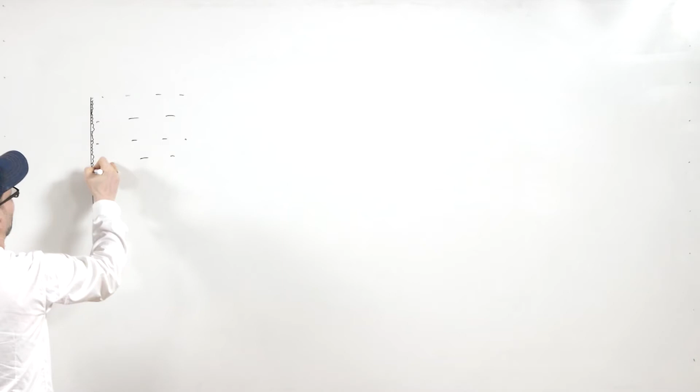As we know, if you look at the cooling curve of pure metals, once you reach this temperature and there is a slight decrease in temperature from this position, there will be formation of tiny grains, which are the nucleus.

Once these nuclei are transferring heat, they transfer it in this direction as well as in this direction. This side is the sand or air, so this is your sand, or it could be air, whatever it is.

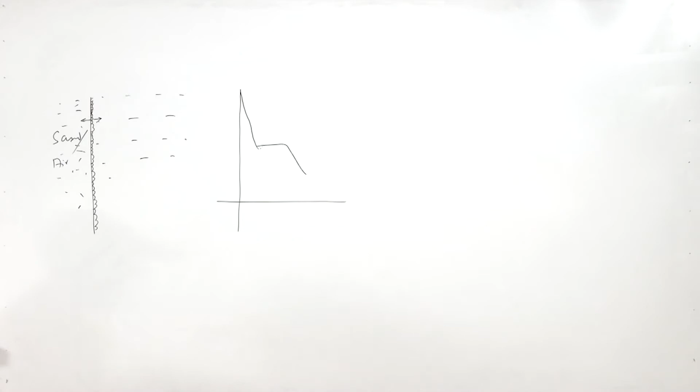Heat will be transferred in this direction as well as in this direction, and that heat is nothing but latent heat. Superheat has already been released up to this point, that is the degree of superheat already released.

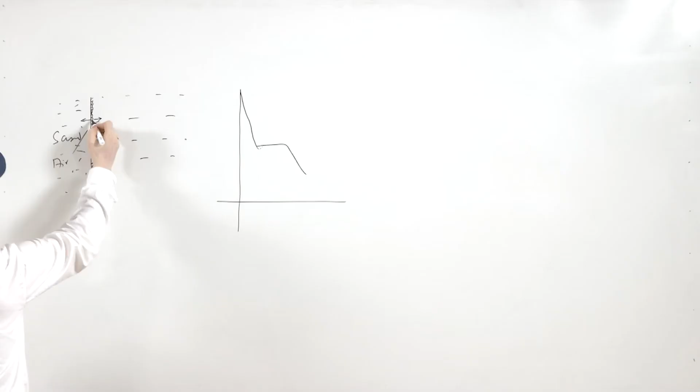Once you come here, the latent heat which is released goes in this direction, and the undercooling of the immediate liquid there is reduced. Because of these conditions there will be undercooling going on, there will basically be a drop in temperature going on.

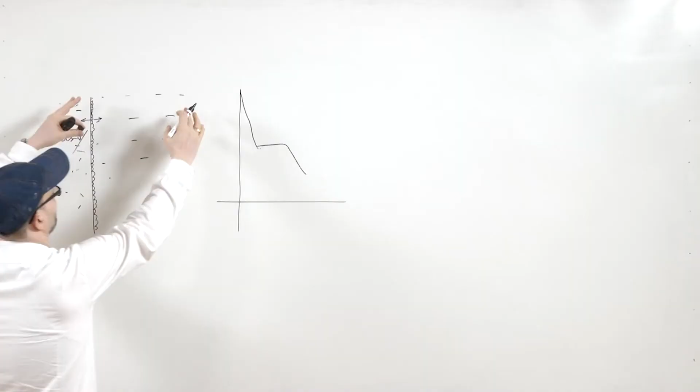Suppose nucleation starts in the whole domain, if the whole domain's temperature comes near the equilibrium temperature, but that is not the case. Wherever there is the largest undercooling, the temperature will fall more rapidly there, and the time will come first at that place where the temperature equals the equilibrium temperature, which is your melting or equilibrium temperature.

As discussed, once heat goes from here into this direction, whatever undercooling this region might have experienced, that undercooling is basically reduced.

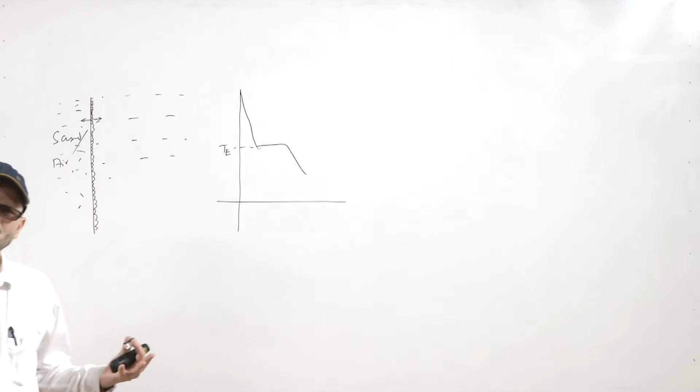So, what happens in this zone also, here the probable temperature will be close to 1085 or maybe 1084, 1086 or so, which will basically come towards 1083, so that it will also start solidifying.

Now, the thing is that when heat releases in that direction, its temperature becomes more. So, that undercooling which it could have experienced is reduced. So, nucleation is not promoted here.

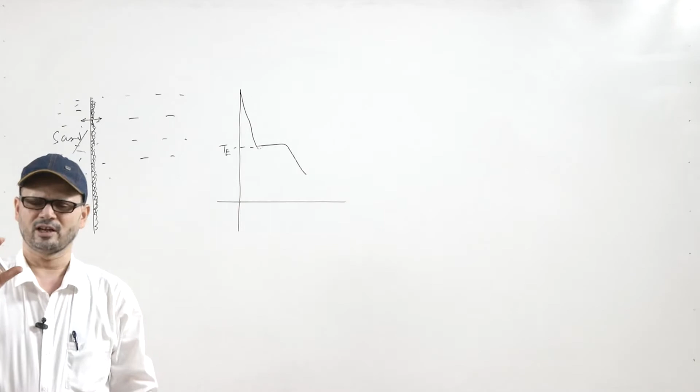So, once you have nucleation here, up to a certain distance you can experience that, because of the degree of undercooling or depending upon the rate of heat extraction, there will be formation of small tiny grains which are spherical, with no directionality. They are known as equiaxed grains.

Now, what happens is that the heat flow is primarily going in this direction. So, since the undercooling experienced or the temperature drop here is delayed, and since it is less, it will be closer to the equilibrium temperature. In that case, the nucleation does not remain predominant.

So, in the early stages of solidification, nucleation is predominant, but as time progresses, because of the heat release and the equalization of temperature in the remaining area, nucleation does not remain predominant, and in that temperature region growth becomes predominant.

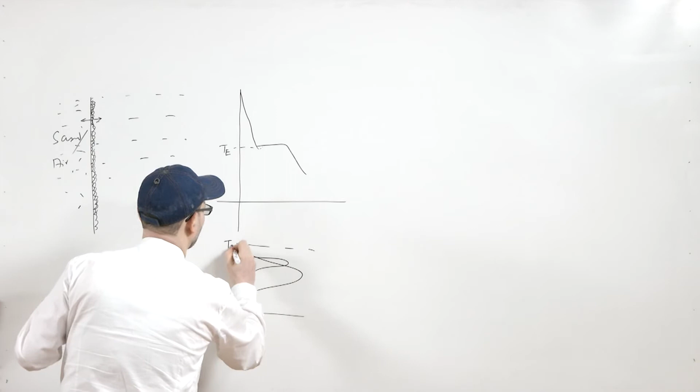We had seen earlier by looking at the rate of nucleation and rate of growth going like this. So, what we saw is that the rate of growth will be maximum towards this. So, if this is the equilibrium temperature, the rate of growth is predominant when the temperature is a little lower, closer to the equilibrium temperature.

So, that is why the growth starts. So, the growth of the grain starts. Now, the nucleation ceases and the growth of these grains starts.

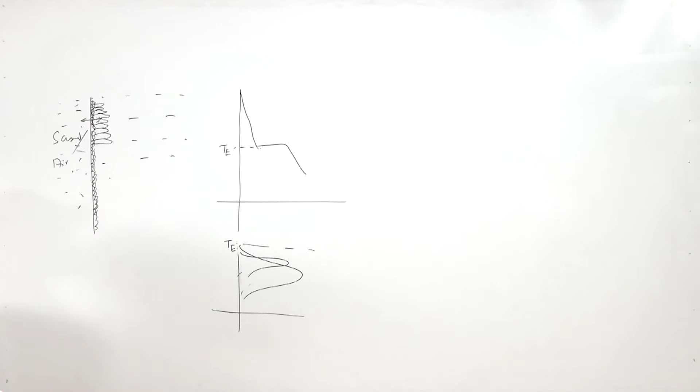Now, growth of grain will normally take place in all directions, because heat transfer may take place in every direction, but because this is the primary direction of heat extraction, the primary growth is taking place in this direction.

So, this growth which takes place here, these are the kind of grains known as columnar grains. So, the initial grains are equiaxed grains, and these grains are known as columnar grains.

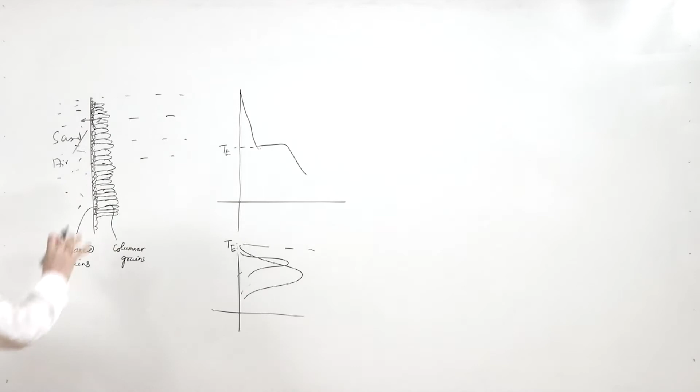This is the typical structure of pure metals, and this growth continues till it reaches the center line of the casting.

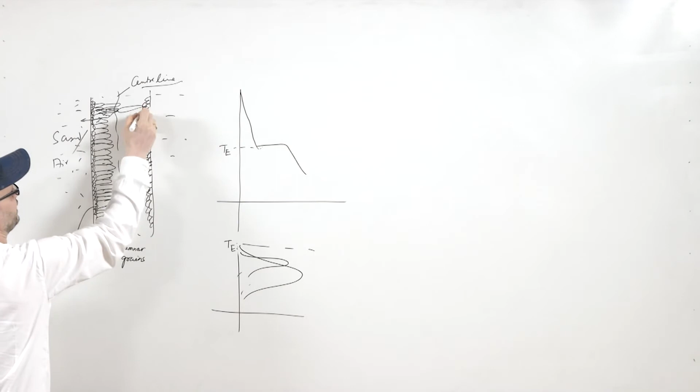So, from this side also you will have similarly fine equiaxed grains initially, and then you will have the columnar grains extending till the center of the casting. Like that you will have the microstructure in the case of pure metals.

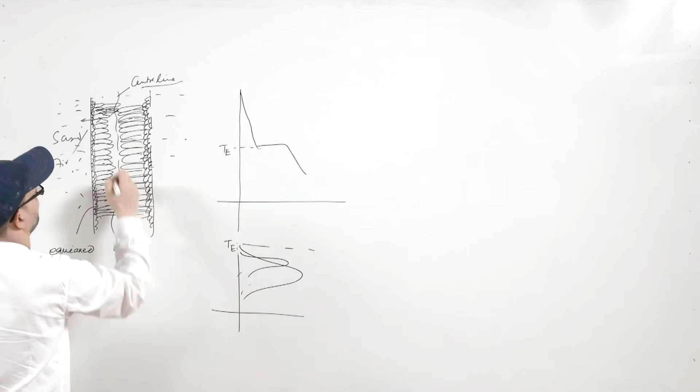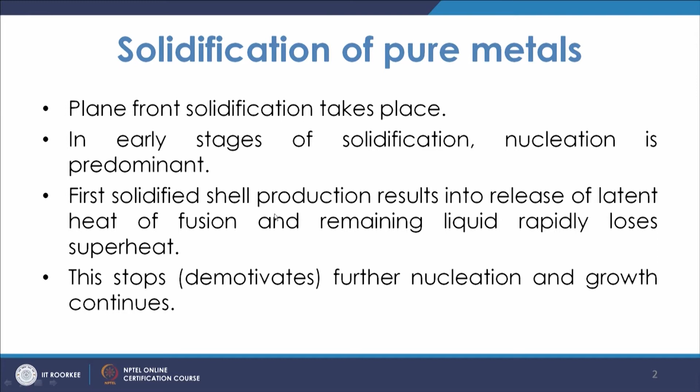So, pure metals show a structure like this. In early stages of solidification, nucleation will be predominant, and the first solidified shell production results in release of latent heat of fusion, and the remaining liquid rapidly loses its superheat. Since it loses its superheat, the chances of further nucleation stop and the chances of growth predominate over nucleation, and that is how solidification takes place.

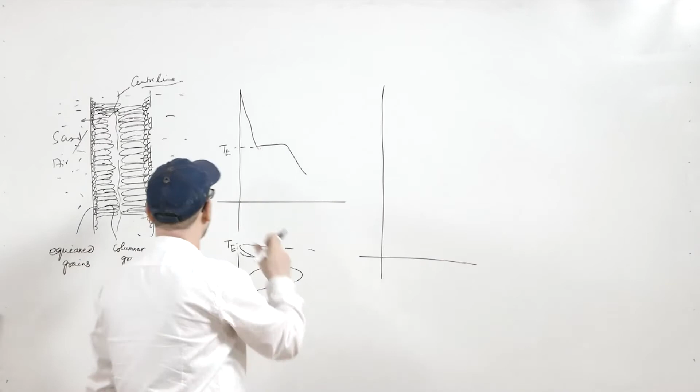So, what happens if you look at the temperature at any point, when you pour the liquid metal, at that time the temperature is given like this. As you see, whenever you start pouring the liquid metal into it, the immediate solidification starts basically at the mold walls. So, if this is the distance from the mold face,

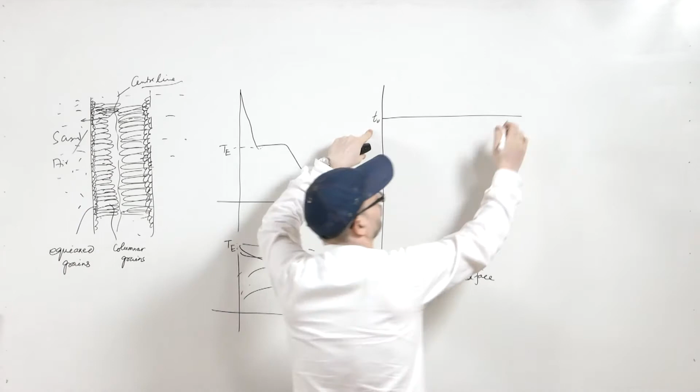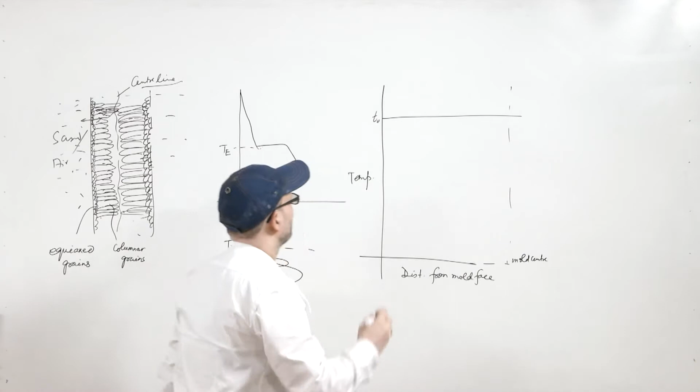at zero time you have this temperature, suppose. Now, at that time, distance-wise, everywhere you have the mold face, and you go suppose into the mold center, maybe this is the mold center, suppose this line is the mold center. So, what we see is initially your temperature is everywhere the same, but then quickly as time progresses, the temperature comes down here. So, this way you will have the temperature line.

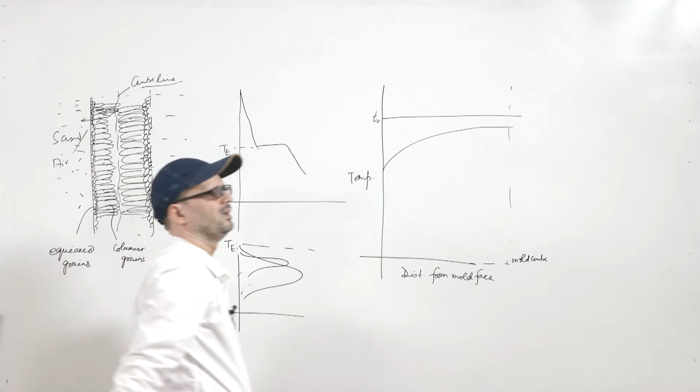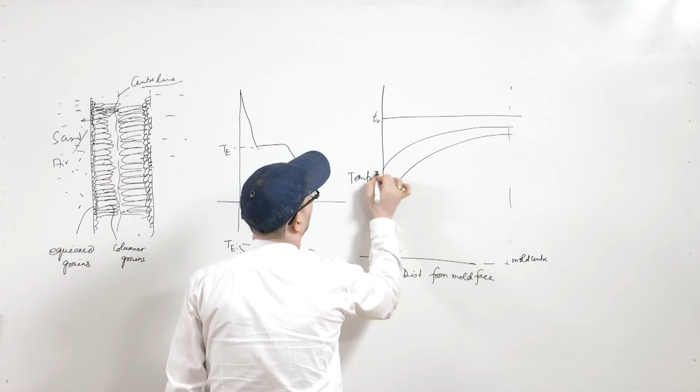Slowly after some time again, maybe your growth goes like this. So, suppose this is your equilibrium temperature. In that case, what we see is that at this mold face, slowly...

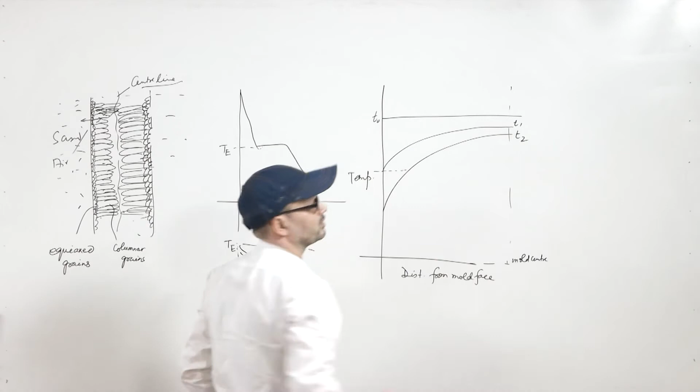So this way, at the center you have temperature, and at the mold face the temperature is becoming quite less. So the solidification has started here itself. At this time, at the face the solidification has started, whereas here in this case that is not the case. Here already it is solidified, and at this point the temperature, so here at this point the solidification will start.

So this way, as the time progresses, you see that there will be more temperature in the central region.

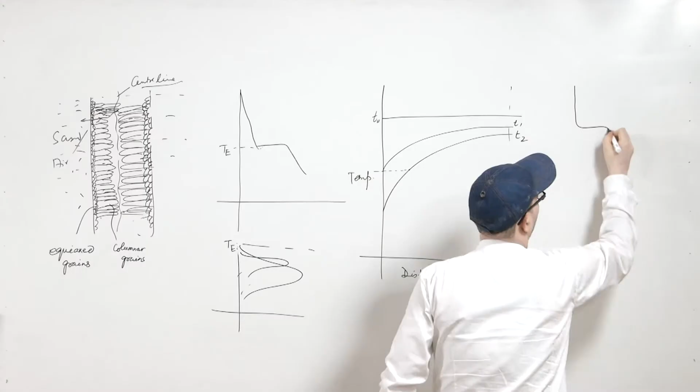So suppose you have a casting here. In that case, if this is the central region, then once you pour, suppose this is a casting and this is your sand, so once you pour the liquid metal into it, then what will happen? The first solidification will start at these places.

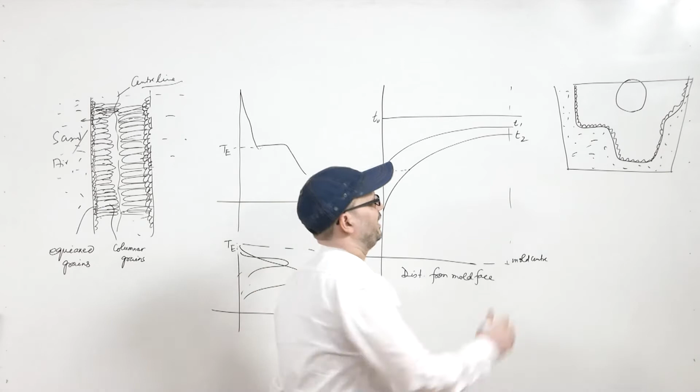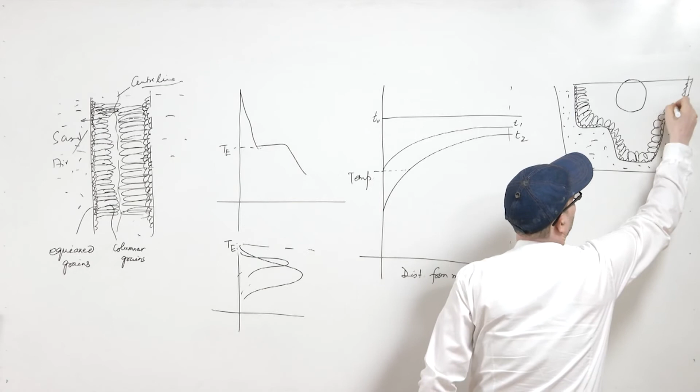Then after that you will have started forming the columnar grains. And so this is how what we have understood is that your initial formation will be of the equiaxed grains, and then further.

Now if you look at this temperature, the temperature drop will be quite fast at this point. So if you take this point as 1, this point as 2 and this point as 3, what we see is that normally the temperature drop, if you look at the cooling curves, at the first point it will quickly come down, it will quickly come down.

So it will come and then it will go like this. And similarly, suppose this is the equilibrium temperature, the second point will come and then it will go like this, the third will come and then they may go like that. So this way you have the delay in these regions, this is the second point and this is the third point.

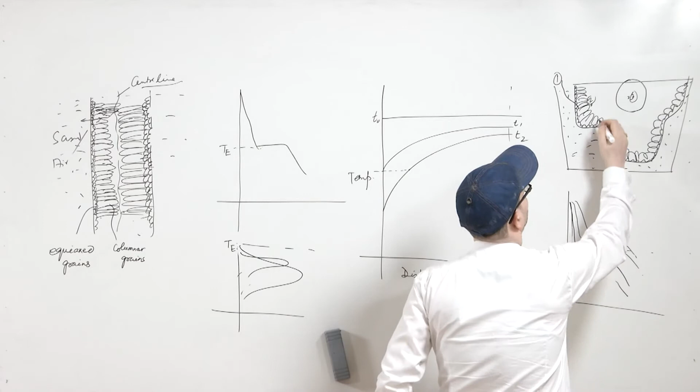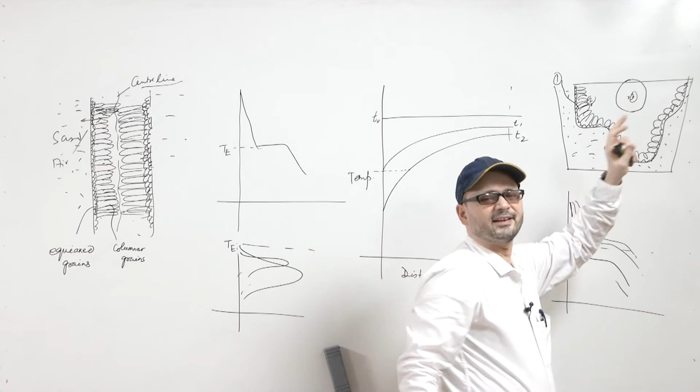So this way you see that the temperature in this region is more and more, it is solidifying in the end. So what we see now is this kind of solidification mechanism, where you will have initially the formation of a certain small thickness, and then this thickness further grows slowly, and this grows in a very uniform way. From both sides, the growth of these cells goes on continuously, and this growth continues till these grains meet at the center.

So in this way the solidification will cease at this point, because from both the sides the solidified cells are approaching each other and they are meeting there. So this way your solidification is complete here.

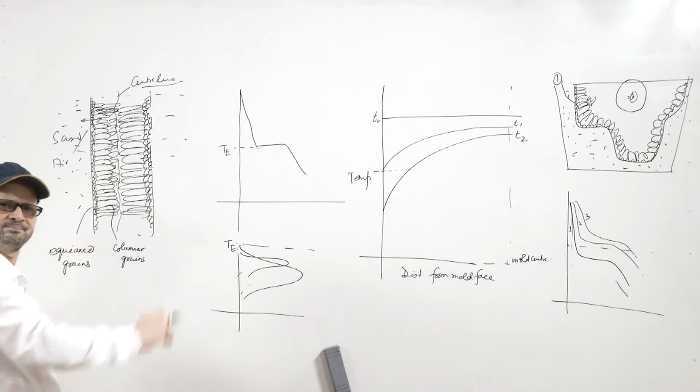So what happens is that with time, suppose you have this section which is to be solidified - initially all is liquid, and with time what will happen is that some portion will get solidified. So this will be solidified at a certain time. So if T is 0, it will become T1, and T1 is more than 0.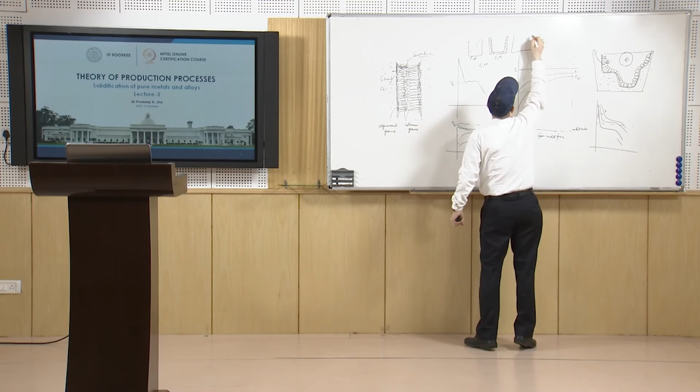Similarly, after some time further, you will have this much solidified. So this will be at T equal to T2. So here at 0 time there is no solidified shell, and there is some thickness of the shell, that is D1. Then at time T2, the solidified shell's thickness is D2. So T2 is more than T1.

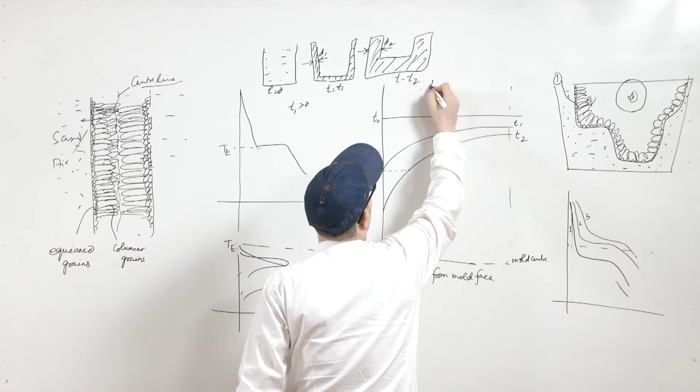So this way, as the time progresses, the thickness of the solidified shell goes on increasing, and it is increasing in a planar way. So the front is moving in a planar way from both the sides, moving in a straight line way, as you see here, that they are moving on the inner sides, and it will go till it reaches the central portion. So at certain time it will completely solidify. So this is an example of plane front solidification.

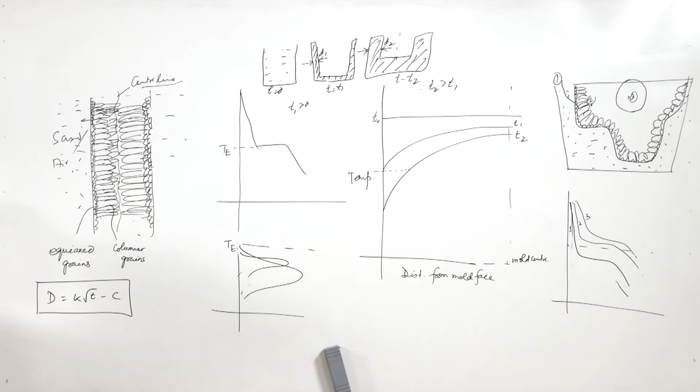So what we see is that this is a case of plane front solidification, and the thickness of the skin solidified - this is known as the skin. So the skin which is formed, initially you will have a very thin skin formed, and slowly the thickness is basically increasing. So the thickness of this solidified skin will be depending upon the time, with the formula d equal to k root T minus C. This formula tells us what will be the thickness of the shell formed at a certain time.

So K and C are constants, and D is the thickness of the skin. The magnitude of K and C is determined by the size of the casting and how fast you are extracting the heat from the mold. So that will depend upon the size of the casting, and the type of mold material used.

So, based on that, the constant K will depend upon, and this C is largely determined by the degree of superheat. This way you can find the value of the thickness of the solidified shell.

Further, if you analyze the solidification time for a casting, it is seen that the solidification time is proportional to the square of the ratio of volume to surface area of the casting. That rule is known as the Chvorinov Rule, proportional to V by A square.

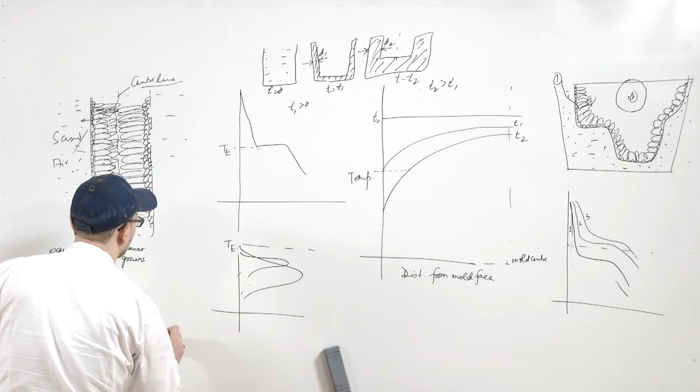So, in this case, this is known as the Chvorinov Rule. This is something about the solidification of pure metals, where the metal is expected to freeze at a constant temperature, or it may also apply in the case of eutectic materials, eutectic composition, where freezing is carried out at a constant temperature.

Now, we should discuss the mechanism of solidification in the case of alloys. As we know, in case of alloys you have a freezing range. So once you see the phase diagram of any binary alloy, you will have a phase diagram like this.

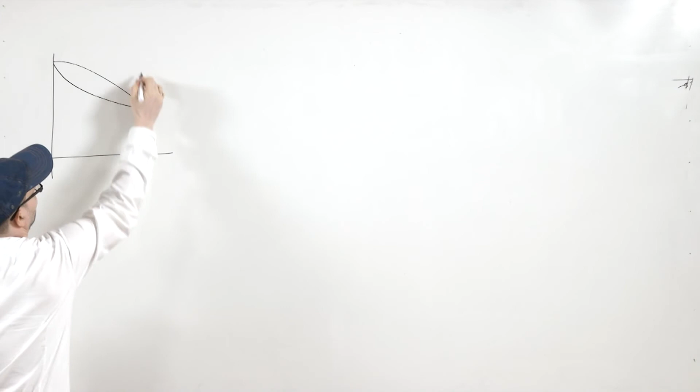So what you see here is the solute percentage. When the temperature drops, the solute particle, so any solid which is precipitating out, this solid will have, at any point you have solid as well as liquid. Now what we see is that at this point you will have solid as well as liquid.

This is the concentration of the precipitating solid. So at this point is A and this point is B. A is the point which talks about the concentration of solute in the solid, whereas in the B part the concentration of solute is different, that is more.

So the liquid which is there in the adjacent region, at the same time you will have solid as well as liquid. The solid is having lower solute concentration, and the liquid which is adjacent to it has higher solute concentration. Now, as you see, with the increase in concentration of the solute percentage, the liquidus line behaves differently.

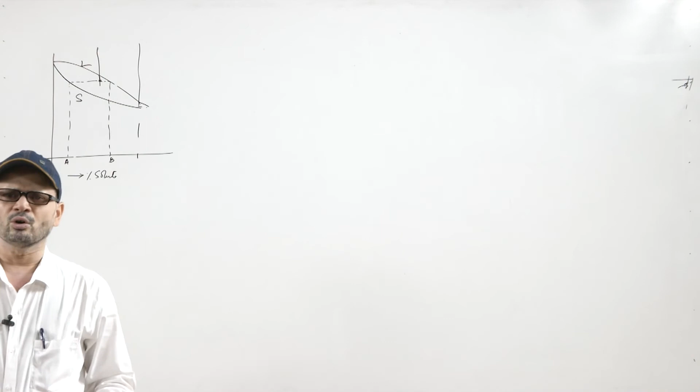This is the liquidus line and this is the solidus line. So with the increase of solute concentration, the liquidus line is basically going down, the liquidus temperature will be less. Now what happens because of that?

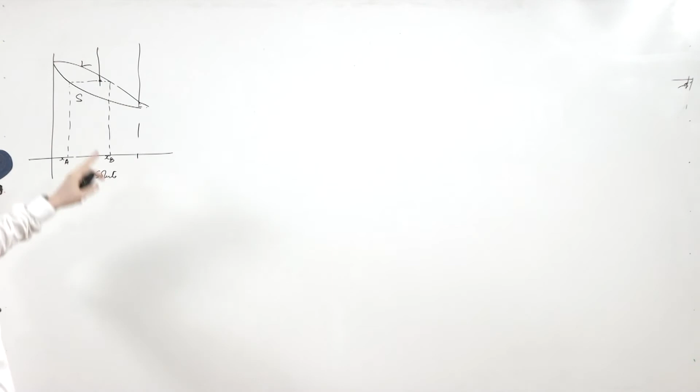Now what we see is that if you talk about this instant, you will have solid of this solute concentration, so suppose you take XA and XB: solid of XA solute concentration, liquid of XB solute concentration. Now this sets up a concentration gradient.

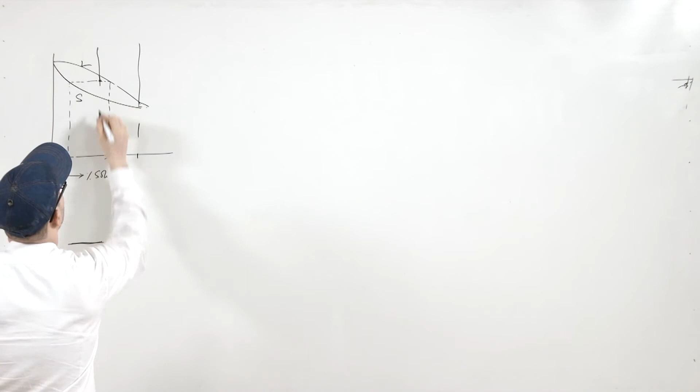Now, because of this concentration gradient at this interface, if you take this point, this is the solute concentration in the solid. Now at this point your concentration will vary this way. This is the concentration on this side.

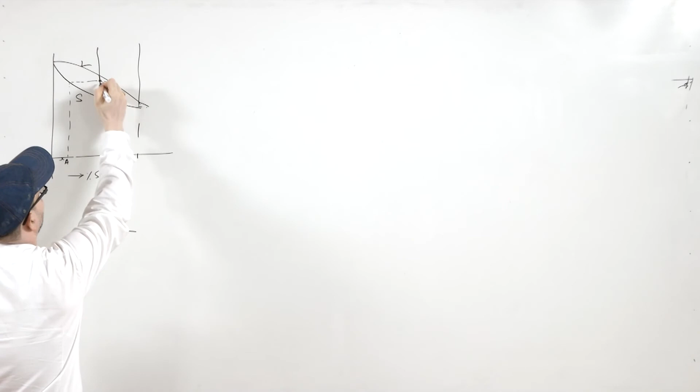So at this point you have the concentration of solute in the solid, and this is the concentration at the interface of the solute in the liquid.

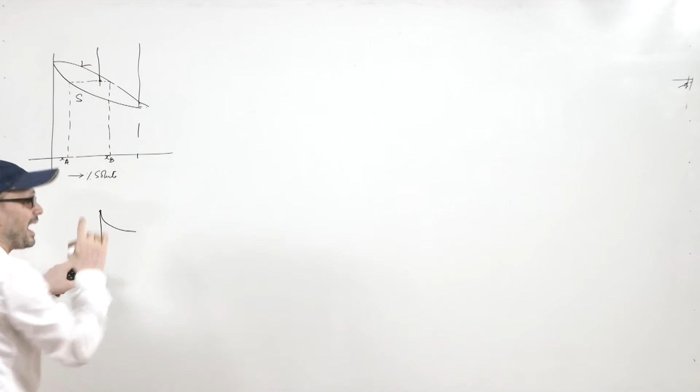So what happens, because of this very high value of solute concentration in the adjacent liquid, if you already have this much solidified layer and it has to move further, since the solute concentration here is quite high, the liquidus temperature will be quite low.

So this liquidus temperature will have a gradient, it goes like this. This is the equilibrium temperature. So basically because of this,

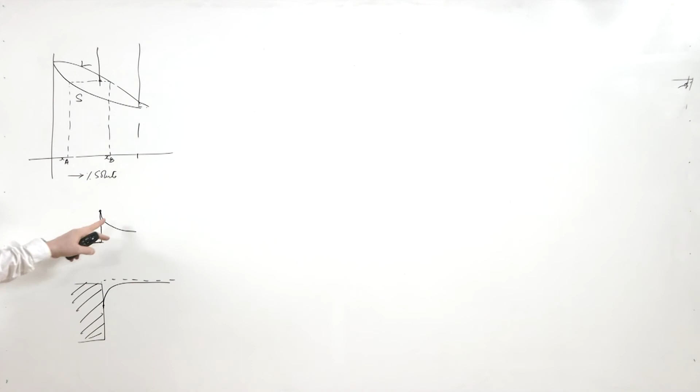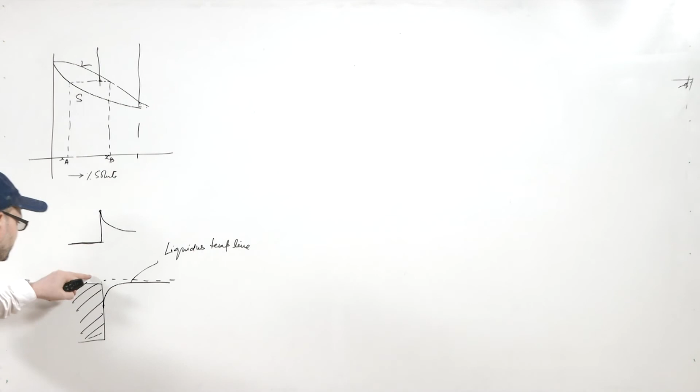solute concentration difference, there will be another new liquidus temperature line which is defined. This liquidus temperature line is modified from the earlier liquidus temperature line into this shape.

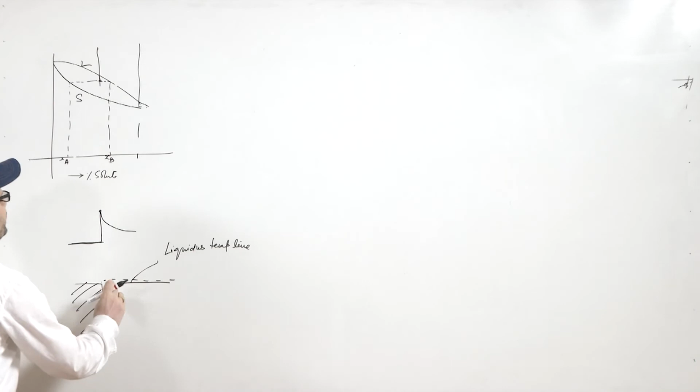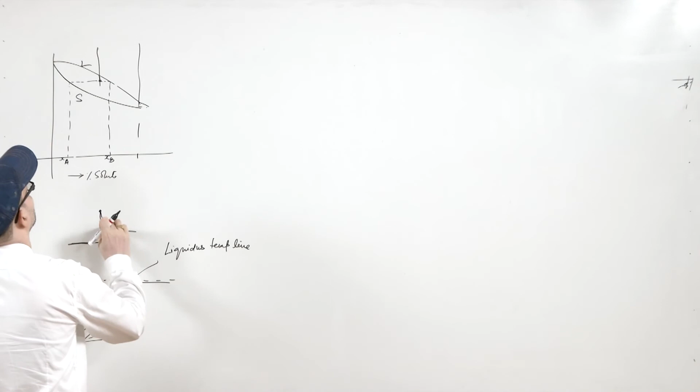And because of that, what you see is that in this region the temperature is quite, so here the liquidus temperature line has come down quite considerably. So now let us see how the solidification will proceed in that case.

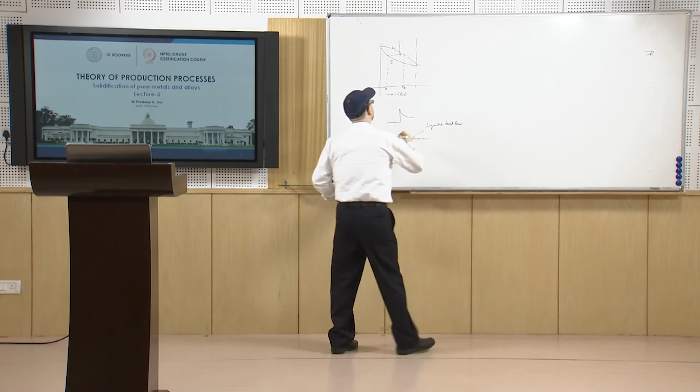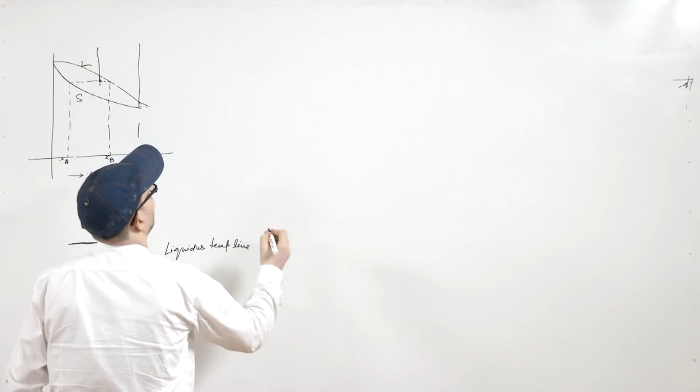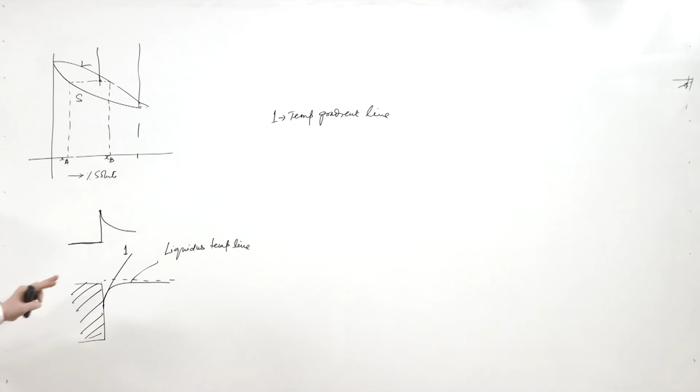Now, if your cooling conditions are such that you have the temperature gradient line 1, if your temperature gradient goes like this, because this is your solidified region, you have the distance from the mold wall on one axis and temperature on the other.

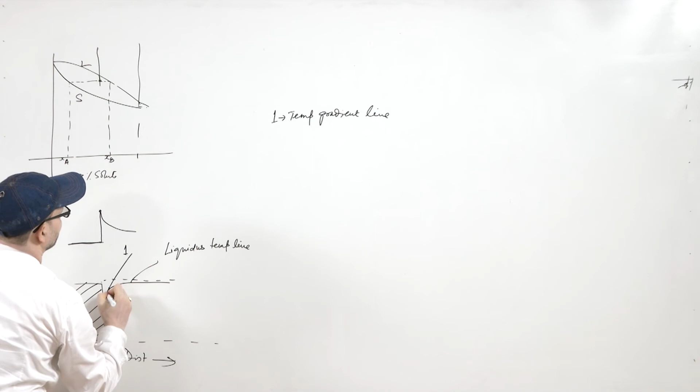Now, in that case, if this is the temperature gradient line, and if it does not go past this liquidus temperature line, in that case you will have a plane front solidification.

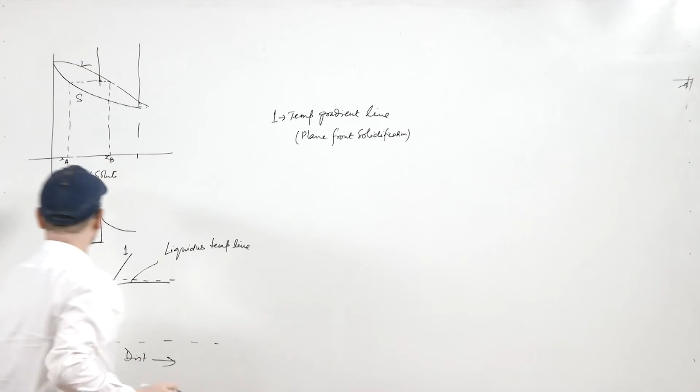So what you see is that the temperature is near the liquidus at this solid cell, and that is why slowly the temperature will come down and the nucleation will start and there will be plane front solidification. Now this is a very high kind of heat extraction rate, so normally that is not achieved.

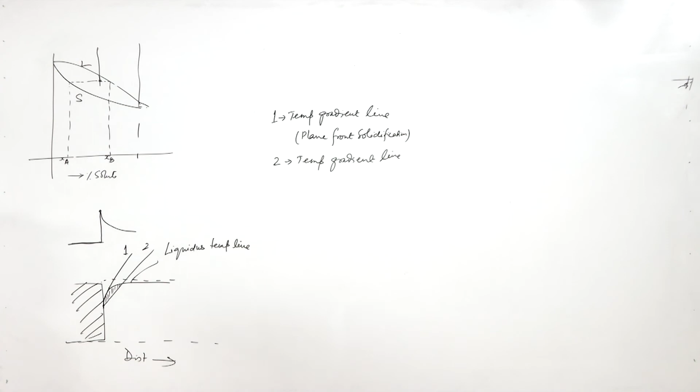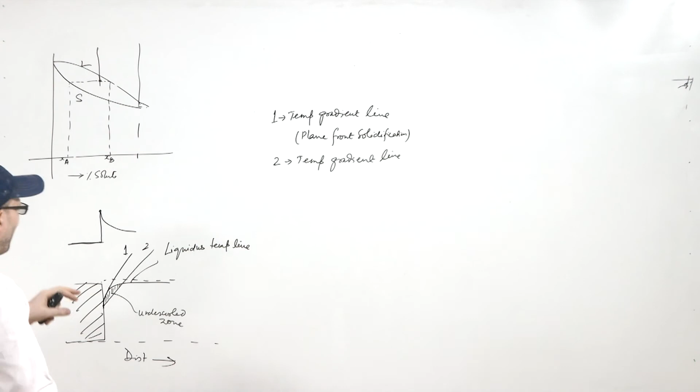So what happens, practically you suppose get this number 2, if 2 is the temperature gradient line. What you see is that in the case of 2 you will have this region which has temperature lower than the liquidus temperature, and this zone is said to be the undercooled zone. This zone has become undercooled because of the change in the solute concentration.

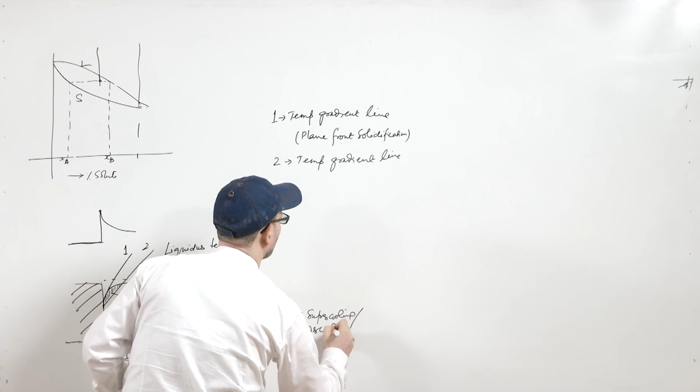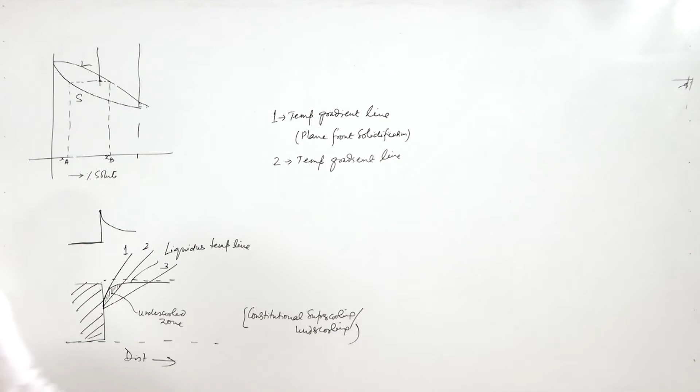So since this undercooling is experienced because of the change in concentration of the solute, this is known as constitutional undercooling, and this is prevalent whenever we talk about the solidification of alloys. Now if the temperature gradient line goes like this, even 3, it becomes large enough. In this case, this is the degree of undercooling that it experiences, and in fact in that case the temperature differential is low enough to promote random nucleation.

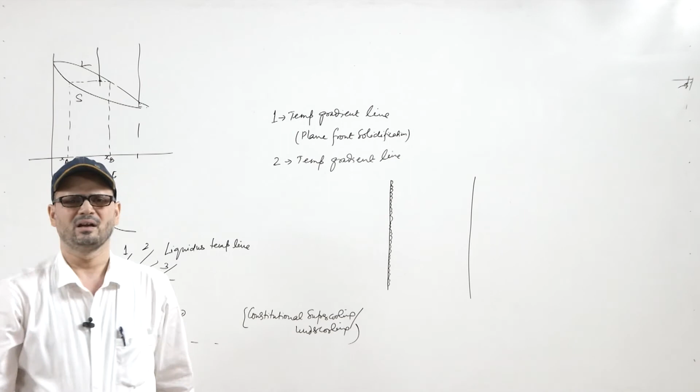Now what happens because of this, how does the structure develop? In the case of alloys, as we see, whenever the liquid metal is poured, first, certainly because there is a large undercooling here, you can have these very small equiaxed grains here, but slowly you develop further.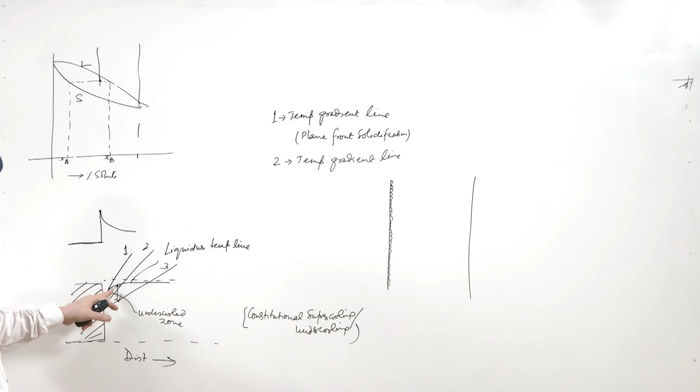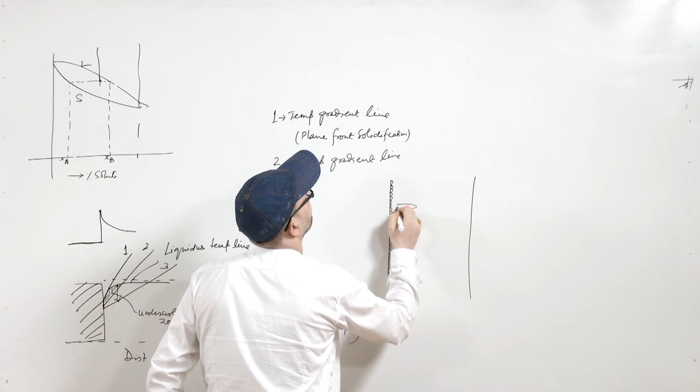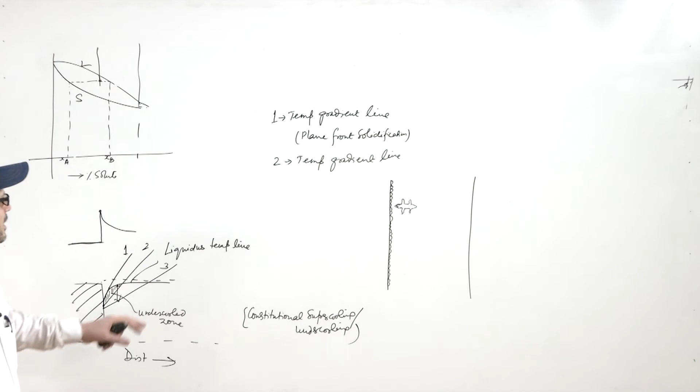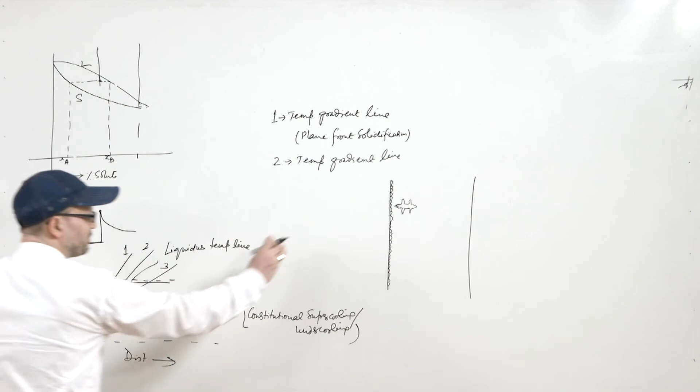Now in this case, because of this undercooling, what we see is that in the zone somewhere you have the formation of a spike, and also there will be growth even in lateral directions. So from that solidified shell itself, in the near liquid zone, you will have the formation of such spike type structure, or arm type structure, tree-like structure.

This type of structure which is formed is known as dendritic structure, and this is all happening because of this undercooled zone. So in this case you will have, in many places, these kinds of spikes or tree-like structures, and this way it goes.

So you will have the growth of columnar grains, but then you will have the formation of these spikes or dendrites, so that is known as columnar dendritic structure.

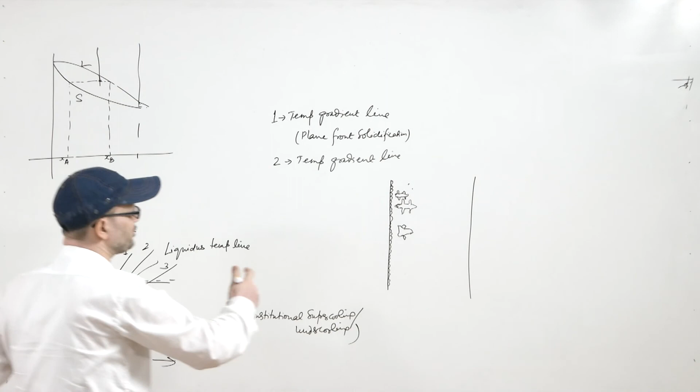Now what happens in the middle zone? In the middle zone, the undercooling is such that because the cooling rate becomes even slower as we go toward the center portion, this differential becomes even more, so that is why here you again get the equiaxed type of structure.

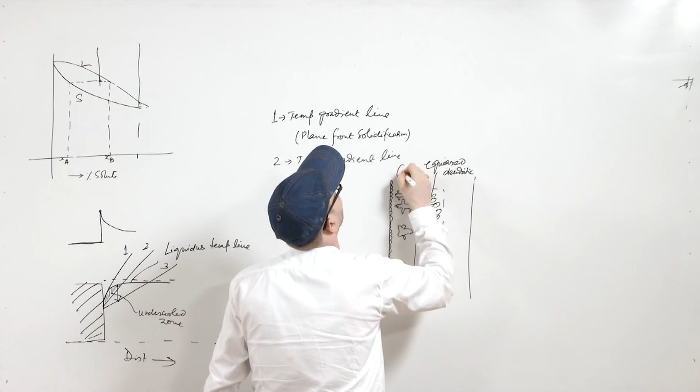So this will be equiaxed dendritic, and this is columnar dendritic. So if you have the wall here, you will have this kind of structure, this is a primary dendrite and these are the secondary arms.

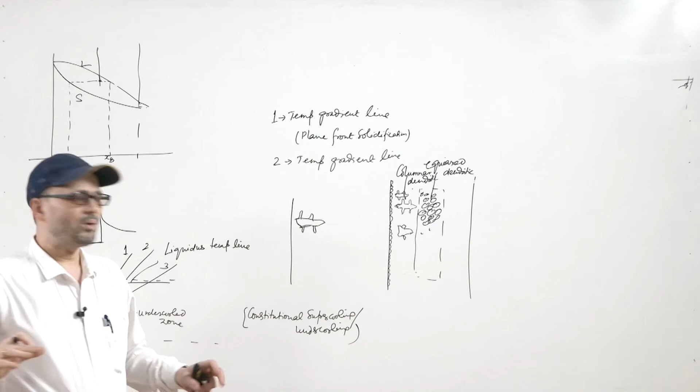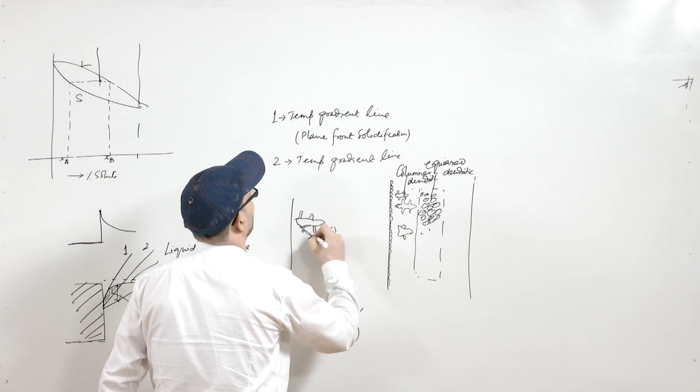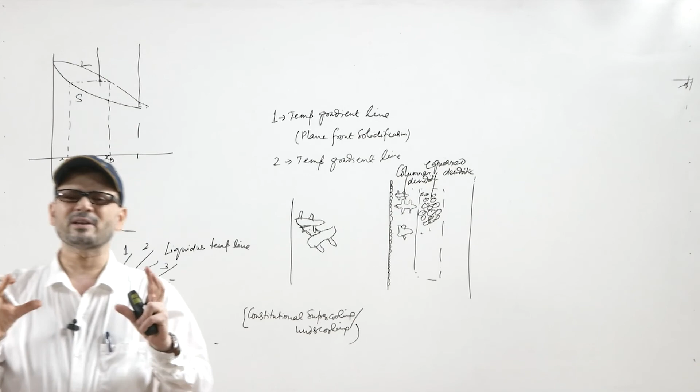What happens, the situation is very much deleterious, because when you have such dendrites, suppose you have another dendrite whose arm has gone like this. Now if the liquid is entrapped in between these arms, then this liquid is basically the source of a shrinkage defect, because there is no plane front solidification. It is a case of tree-like structure formation, and in between the arms there may be trapment of liquid steel or liquid material, and that may be the source of some defect.

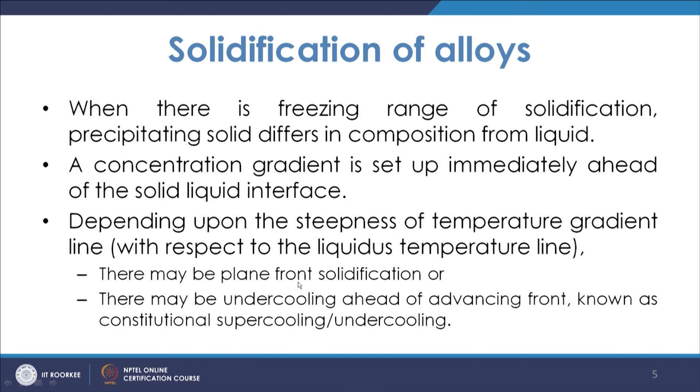So that is a case of dendritic type of solidification. What we see here is that when there is a freezing range of solidification, the precipitating solid differs in composition from the liquid, and a concentration gradient is set up, and depending upon that you may have plane front solidification. When you have this condition, you will have undercooling ahead of the advancing front, and that is constitutional supercooling.

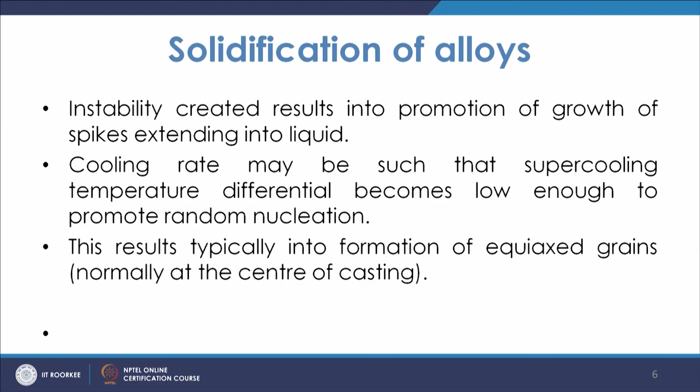And that promotes the growth of spikes extending into the liquid, and in the central zone you will have the formation of equiaxed type structures. What you see here is how the dendrites move, and then you will have the formation of dendritic structure in case of alloys. Thank you very much.